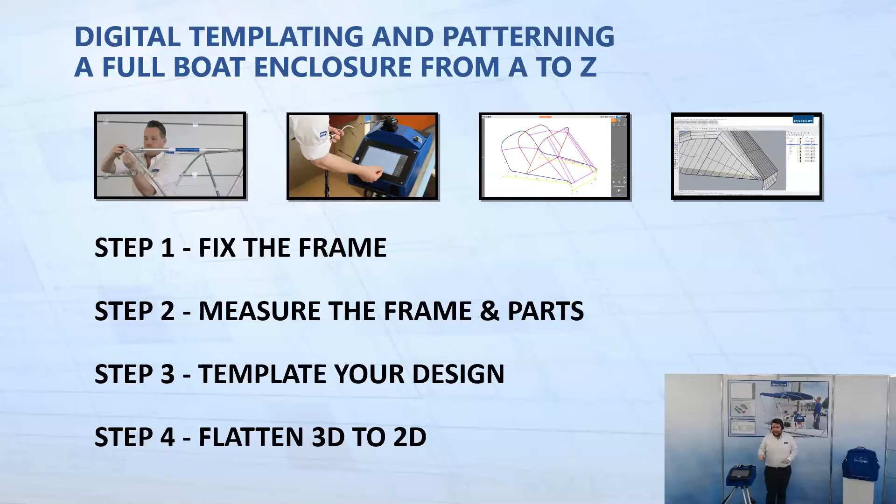We don't want you to change the method you work. We want you to change just the tools that you are using. We want you to skip the nylon and go digital with the Proliner Canvas Package. So let's see how this can be done.

Step 1, fix the frame. Determine the correct height of the frame. We can make sure that the frame stays in position while measuring. To do that, a tensor set is going to be very helpful. Instead of using just duct tape or a simple rope, the tensor will help you, and you can also mark the points that you want to measure, and then indicate where the canvas will overhang and how the whole thing will go. And let's see how this can be done in reality.

So I fix the frame, the Proliner. That's the mini tripod that can come pretty handy for such cases. That's the first part of the tensor that will help us to fix the frame in the position that we really want, and it won't be moving or have any issues afterwards when we want to measure. By clicking and screwing there, you can have it in the exact position, and this is adjustable. We do the same on the other side, of course.

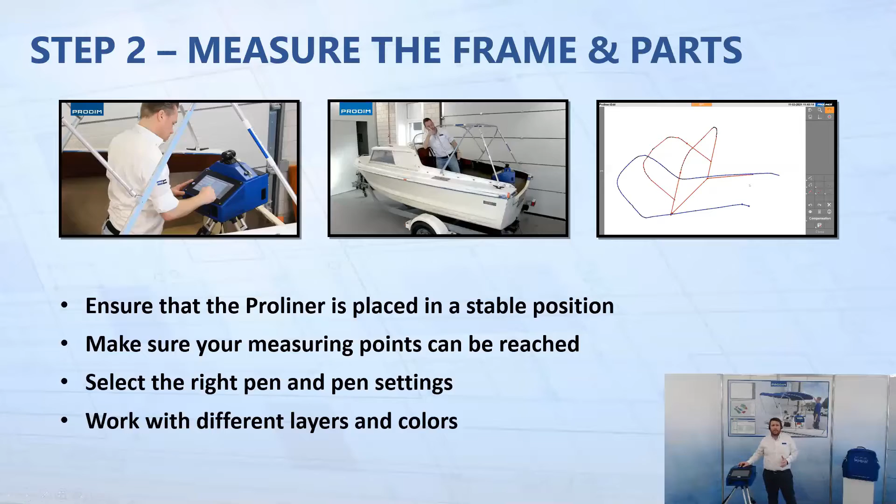Then you can select the right pen, and the pen settings could be the normal pen, could be the hook pen, could be the IPT. And then we can also work with different layers, different colors, because that will make our life also easier in the editing part afterwards. So let's see how this part goes.

Here's where we're going to create the 3D frame, the 3D digital template, sorry. And I start by creating a sketch of how I want my cover to be. This, of course, can be based on your experience and the customer's needs. You already do this even when you measure manually, and it helps you to visualize what you need and which points are going to be pretty useful to have in your drawing. So this is what I'm looking for.

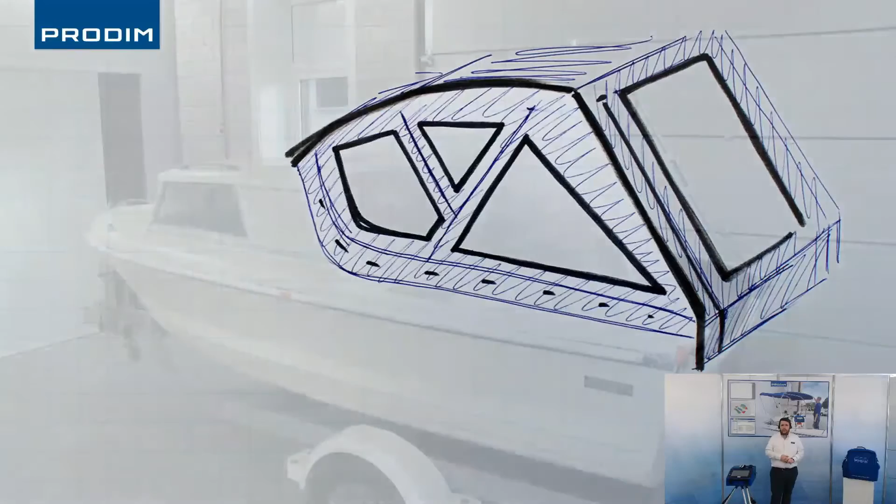I have the Proliner set there. As you know, there is no need for leveling or calibration or anything like that. I can immediately start measuring. I don't care if it's windy, if it's not windy, if it's sunny, if it's not sunny. It doesn't matter, and it won't affect any of my measurements. I put the Proliner in the position where I believe that I can reach all the points that I want to have in my drawing.

I just put the name and the project name and the file name, and I go to my settings. In this case, instead of the normal pointer, the hook pen is gonna come very handy, as it will allow me not only to reach the points that I could get with the normal pointer, but also reach the points that could be behind an obstacle or in the backside of the tube. And that can be very, very useful. And of course, it's part of the Proliner Canvas Package.

We start by getting 3 points, because these 3 points on the bottom of this structure will help us a lot to align our drawing properly in 3D, in the CAD. Already started getting the points that are needed. Of course, for the straight parts, just a couple of points are enough. For the parts where there are radii, the more the better. So going all around, and from the point where my material stops touching the frame, I go directly down to the bottom of this structure.

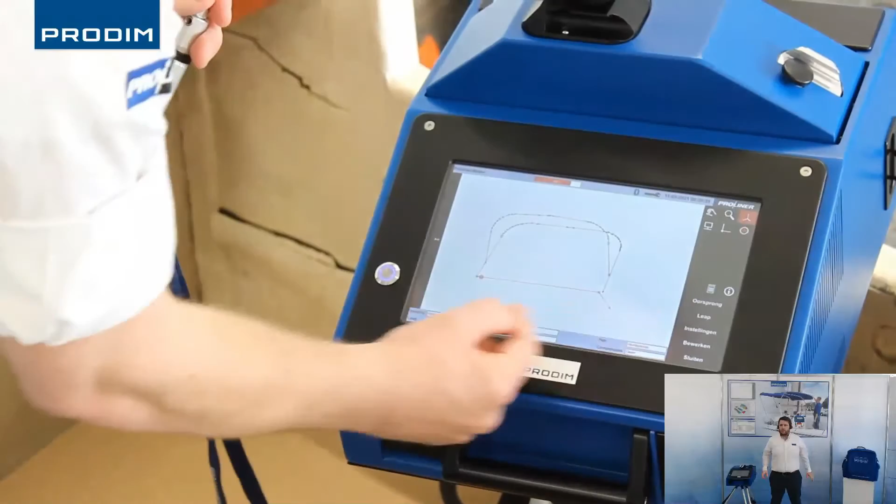And I can already visualize what I have measured. There's no need to export and carry an extra computer or a laptop to visualize, go back and all these things. No, I see on the spot what I have already measured. And this is the very beginning of my drawing.

Now I'm gonna measure the boat itself, so I can have more information, because I will need this line later on for the editing part in order to make sure that this is where the material is going to be touching, or this is where the material is not going to be the canvas anymore, but the transparent part for the windows or something like this might be starting there.

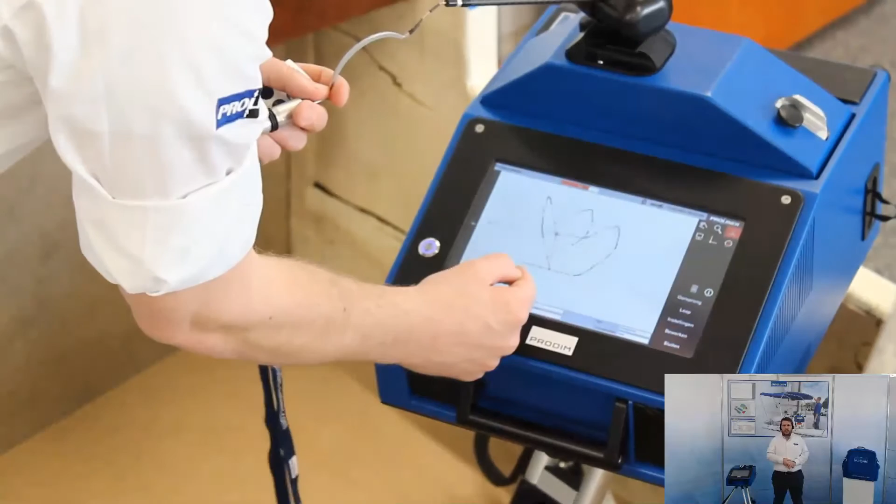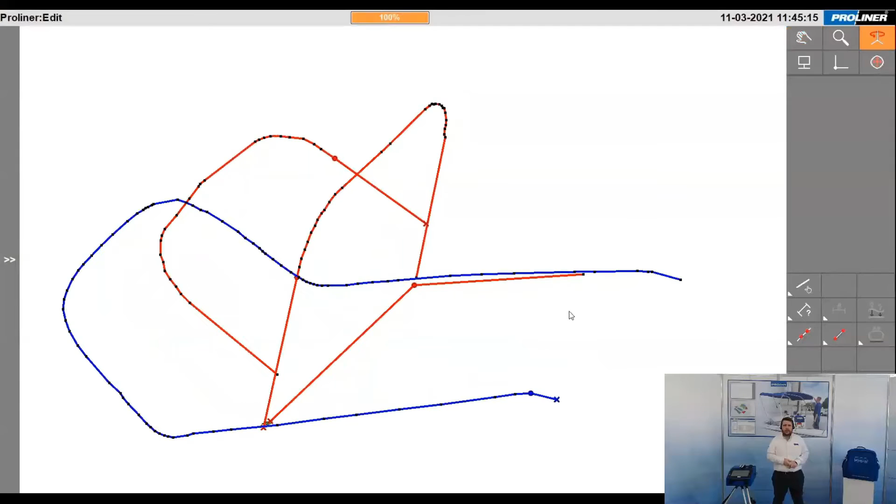So I can visualize here, I can see what I have measured already there. I can move it and rotate it in space in 3D and see how it looks. And this is all I need from that at that point.

The next step is to create your design, to template your design. You start by envisioning your canvas. You have already done a quick sketch. Then you can go more into details. You can decide where to put the windows, where to put the zippers, where to put all the small things. You can determine where you want to have your lines, and you can visualize them by using the blue tape. Especially in the beginning, it's going to be very handy. The more confident you get in 3D CAD, the more you can even skip that part.

You can determine which parts are going to overlap, and of course mark the edges, mark the fasteners, mark the starts for your measurements. And for the points that are not easy to reach with the normal pen, the IPT is where it can come very handy. IPT stands for invisible point technology, so I can measure all the points that I cannot reach with the normal pen. So let's go and see how this can be done.

This is my sketch. This is what I want to achieve at the end of the day. This part, I don't need it anymore. So this is where I can visualize and determine where I want this line, which is going to be, for example, the end of the windows, and I can mark it there so I can see it in reality, and then I can transfer this information to my drawing and eventually to the CAD part. This is for the backside, the side panel, the backside of the side panel.

And that actually looks good. Of course, we do the same at the other side. Here's where the windows will go. So this is what we need, and this is for the side panel of the back side of the back panel.

Mark it, get the extra blue tape. This for the back side, and of course this for the other side of my cover. Marking the points can also come very handy because you know exactly where you want your meeting points of the lines to be. That is there in the back side where you actually have 3 different lines meeting there.

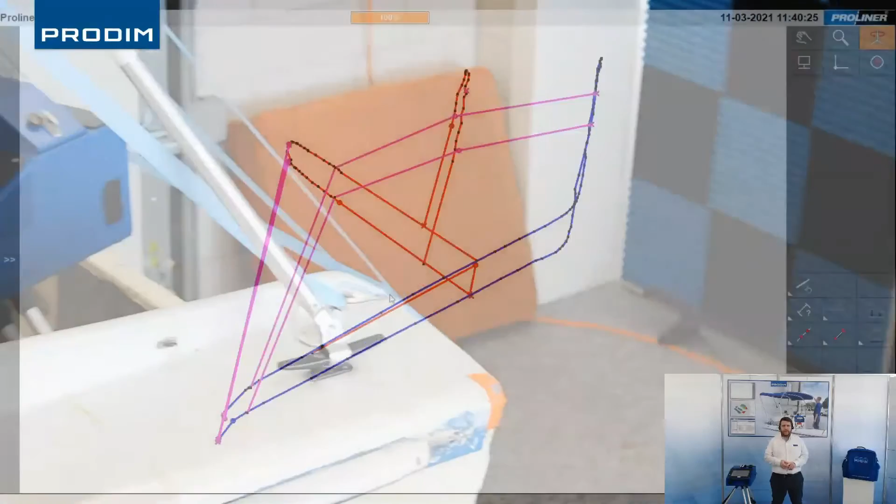Measure the one side, going to measure the same structure for the side panel on the other side. Slowly it has started getting closer and closer to the final shape. This is how it looks like now. So I've got most of the basic information that I need. By using the layers, I can visualize immediately what has been measured now, and I can separate them even easier.

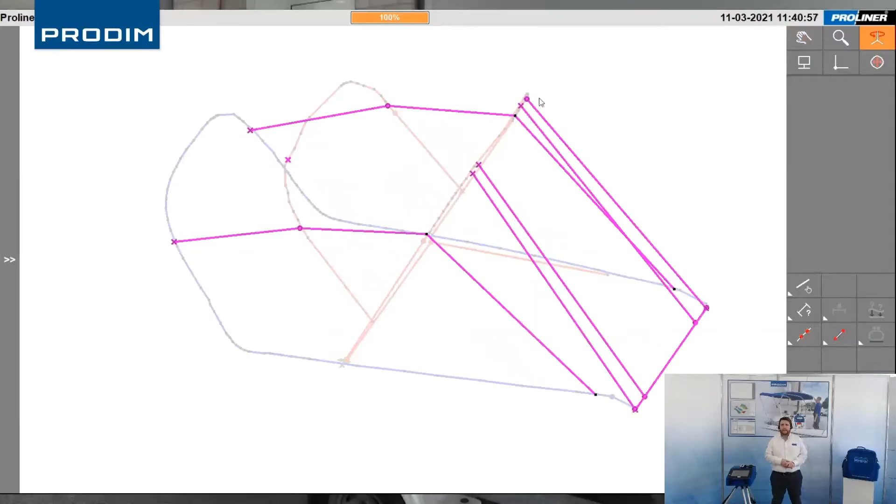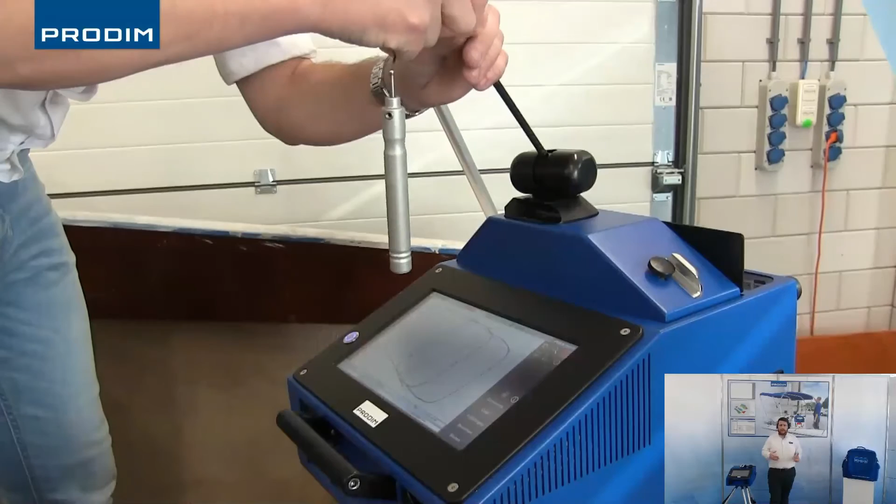And now I don't need the lines. I can actually disassemble the tensor set, as I do not need anymore my frame to be there. This is where I want to reach the points on the external part, on the outside of the boat, and this is where the IPT comes very handy. The IPT goes from 200 milli up to 800 milli, so whatever the case, I can reach the points.

It comes with 3 different tips: the sharp one, the one that looks like a ball, and this one that looks like there is a curve inside. So where I already have a point, I can just go, and it gives me extra stability when I'm getting the points. By measuring multiple points, the Proliner gets enough data to do the calculations on which is exactly the point that I'm really measuring. You see this movement like a cross gets enough points for the Proliner to do the math needed.

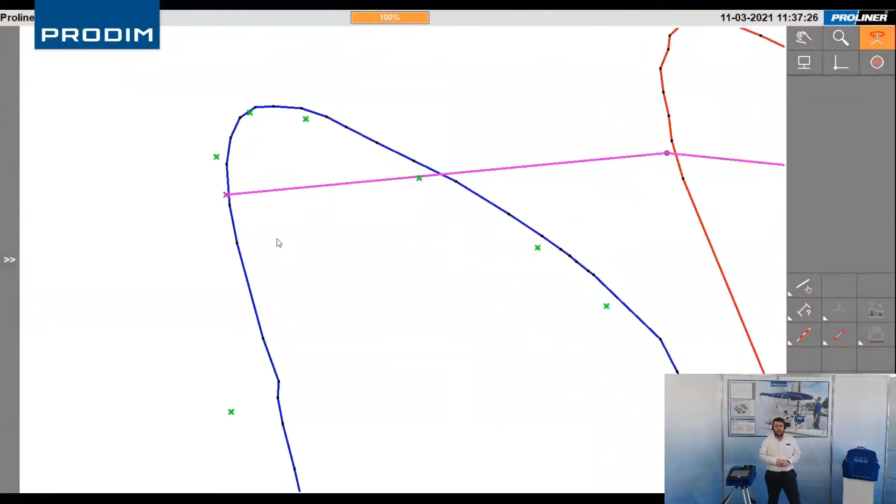I get all the points that I need, starting from one side, going to the other side of the boat, because these are going to be very useful for the buttons or whatever else I want to have there. The same thing, of course, goes for the top side, front side of the boat, of the structure there, and you can see already here the points that are measured with the IPT with the green color, different layers, as it will be handy in the editing part afterwards.

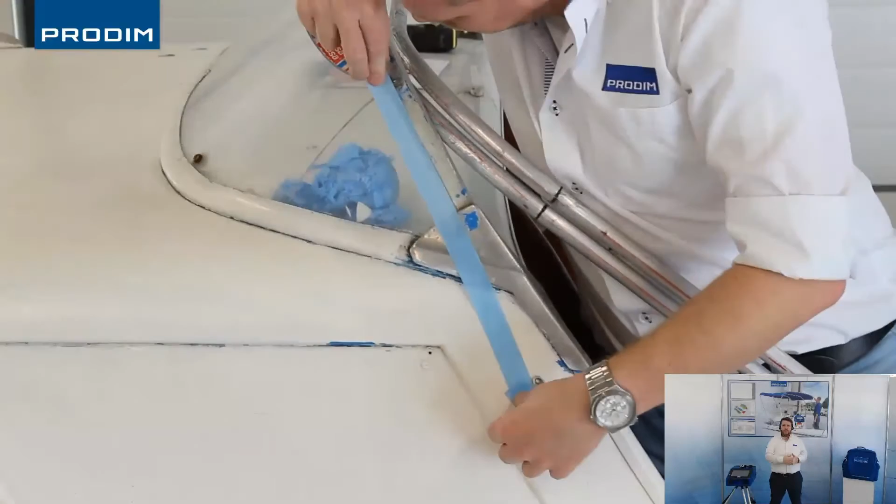And here the blue tape actually helps me even more to visualize where I want to have the end of my panel and how it will follow on that side up to the front side of my structure. It will go from the deck level going up.

Again, the IPT will help me to reach all the points without even needing to reposition the Proliner and use the leapfrog function. Of course, if needed, I can also use that part, but in that case the IPT is way handier.

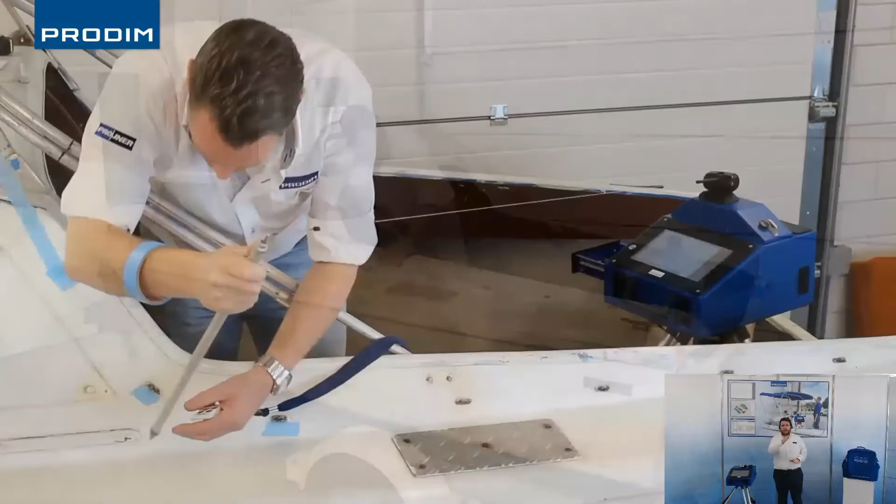So this line actually will help me to see where's the deck level and how far I can go on that part. Here's going to be the end of my side panel, and I create slowly this curve there.

More and more points with the IPT. The same here on the top of the boat, and of course the same is going to be on the other side.

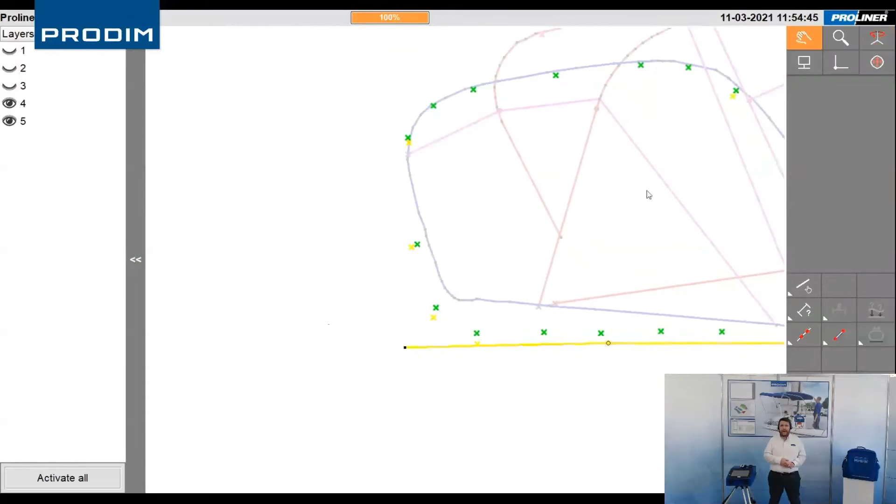And I have got almost all the points that I want. I can see the back of the boat, I can see the decking level, I can see the points that are going to be useful to mark the buttons. I can see where I want to have the end of my panel, and these are all the information that I actually need.

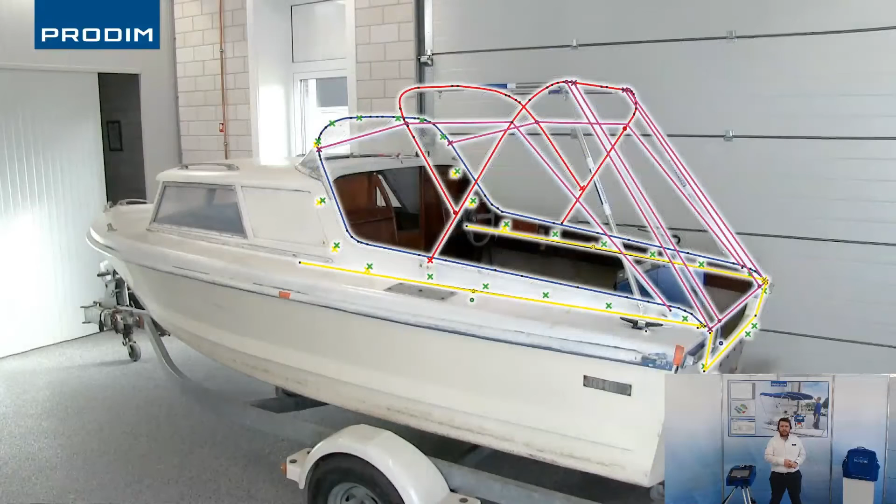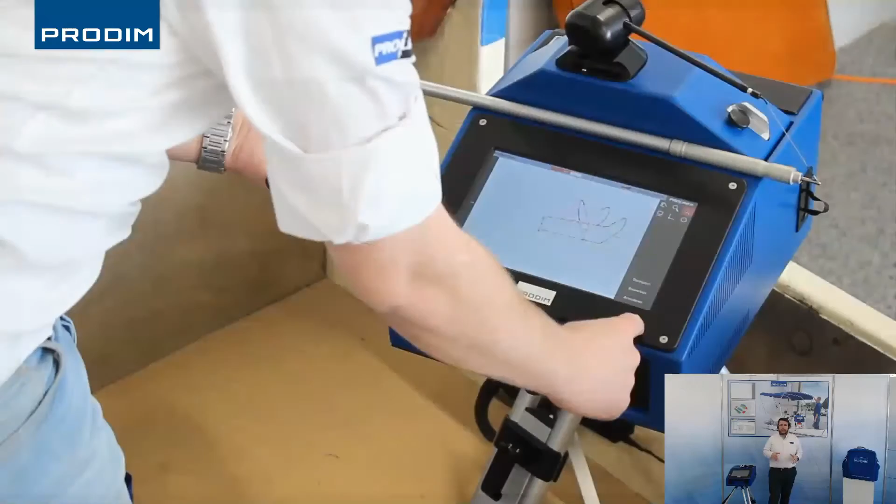So from my sketch to the Proliner 3D measurement, I can already see it on the Proliner, as we discussed before. I'm measuring in a marina in the middle of nowhere, and I can just use my smartphone to send the files from the Proliner, while I'm still on the boat, back to the office for processing, and then go to the next boat and keep measuring.

So once I'm back in the office, there is a process that has to be followed to go from the 3D Proliner measurement to the 2D production-ready files. We start by aligning the measurement, then intersect and connect the lines, loft to generate the 3D surfaces, and then project the markers and all the lines onto these surfaces.

Then from 3D, I unroll everything and go to 2D, where I will need the silhouette. I don't need the surfaces anymore, just the external contours.

Once that's done, I can also do the tension - there's a trick on how you can have everything super tight without extra material. You can add reinforcements, zippers and windows as the customer asks or as you want them to be. You can also add seams and markers to help create the files ready for production.

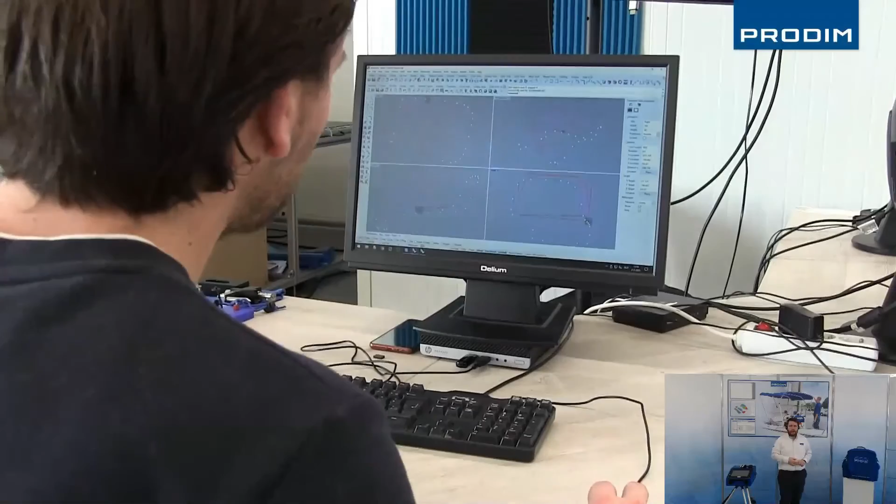So how can this be done? I'm still on the boat - I can send the files back to the office, or just open my laptop there and start working.

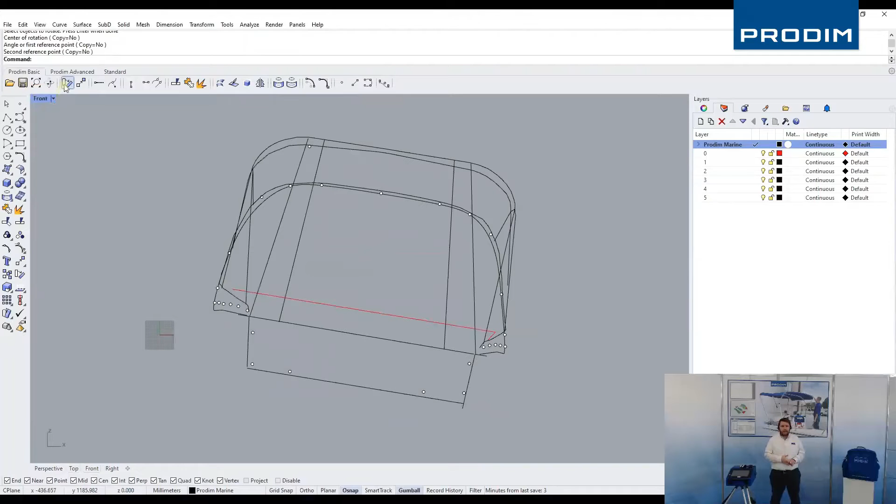Step number 1 is to align the measurement. This is where the 3 points we got in the beginning come very handy. I can use them to align the whole measurement. Here is that line, and I bring it onto a horizontal plane, so I have different perspectives. Here I'm using the front view, as it will be even easier for me when I need to use the different perspectives.

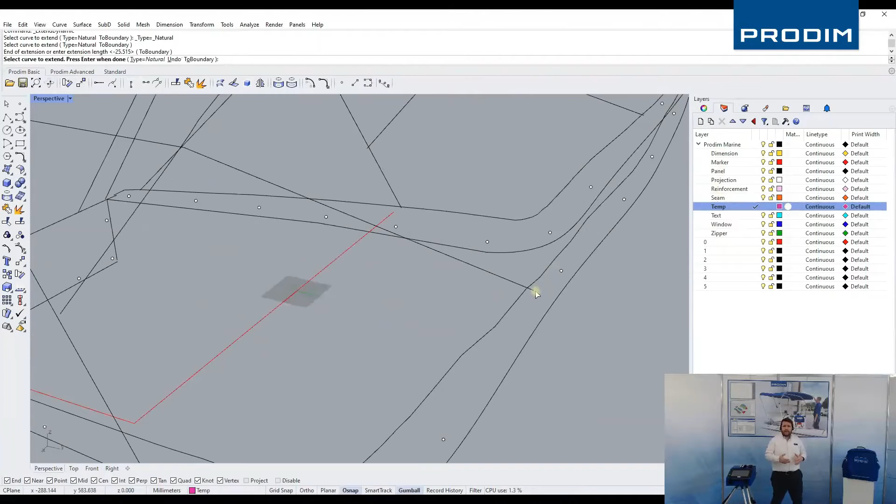Step number 2 is to intersect and connect the lines, because we've measured the lines in 3D - they're in space, so they're not connected, not like simple 2D drawings. You can extend the lines and see exactly where they meet with each other, which is very important when creating the actual surfaces. So I extend the lines where I want them to go all around my drawing, then use the command called closest point, which shows the closest point between the lines.

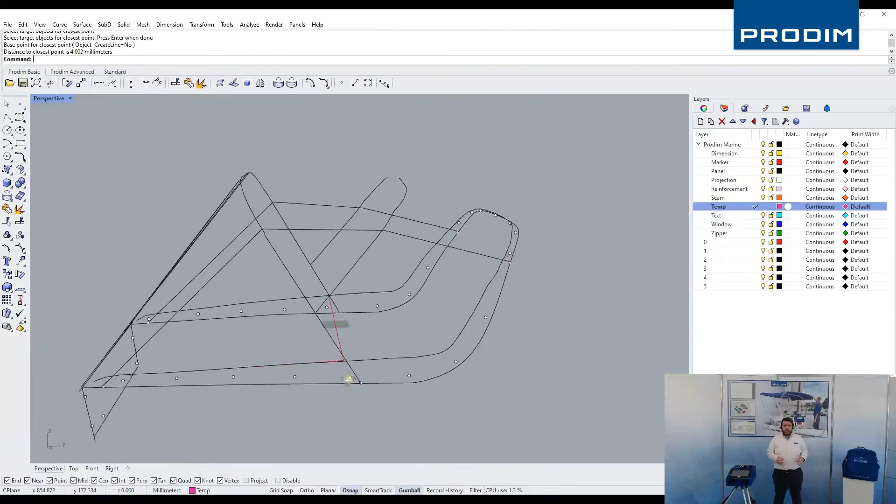You can see at the top there is the Rhino Prodim toolbar, which comes as part of the package. There are about 15-20 commands that you're going to be using on a daily basis - those commands are enough to create and finalize your drawing. There's no need to go around looking for them; we already have them ready for you.

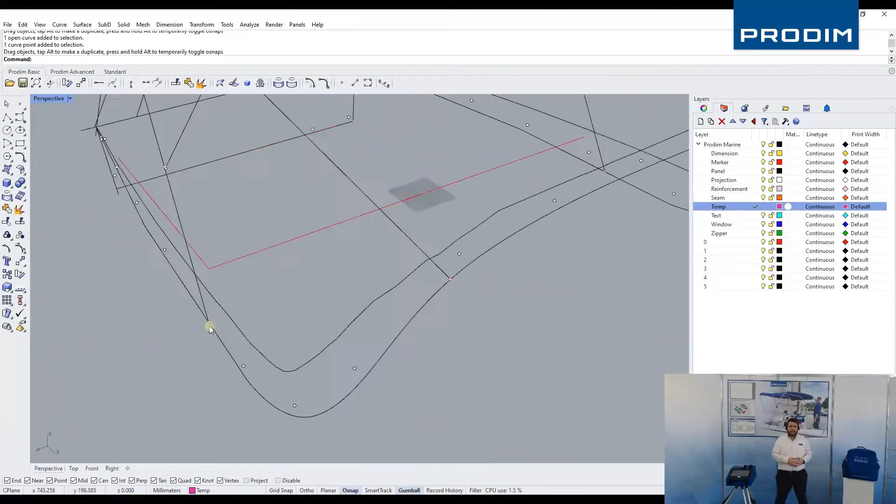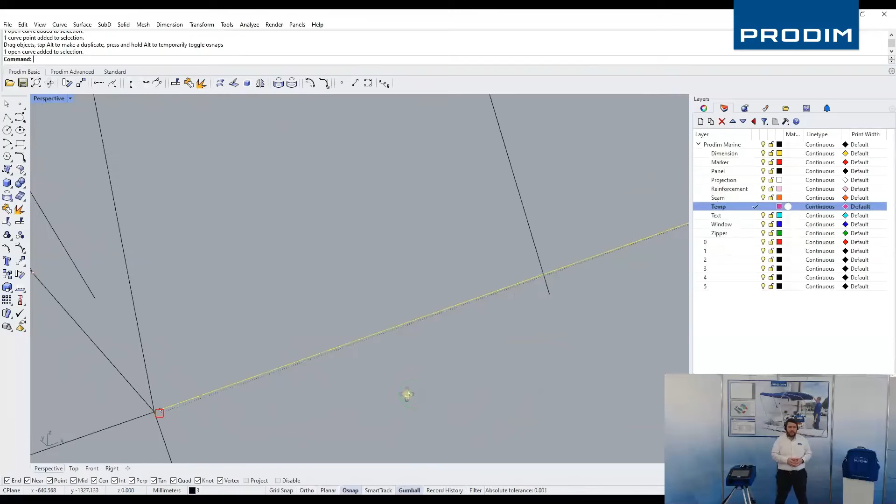Connecting everything so that we have the correct lines where they want to be, repositioning to make sure everything is on the spot. Here is also where the 3 points meet, and the same happens on the other side, connecting all the points there.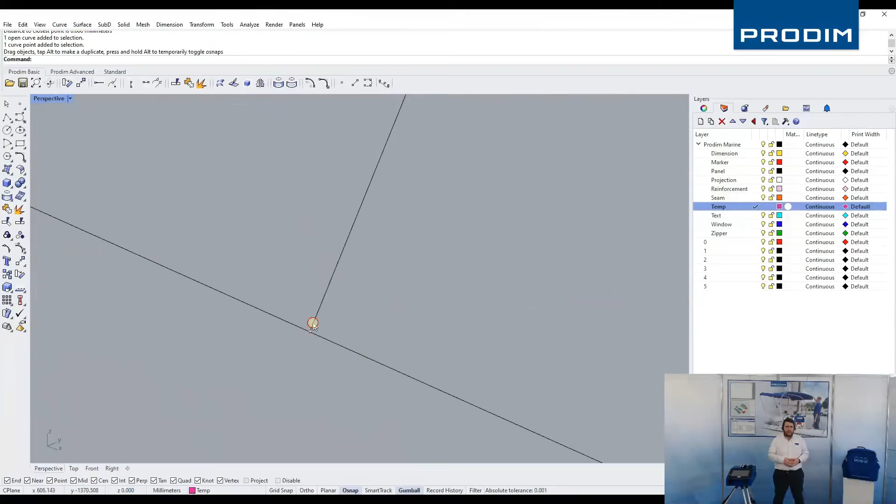Rotating my drawing is very important and useful because it makes everything so much easier to see from the correct perspective. Again, the closest point command comes in handy, as I can move the line exactly to the point where they would be meeting, with the minimum deviation.

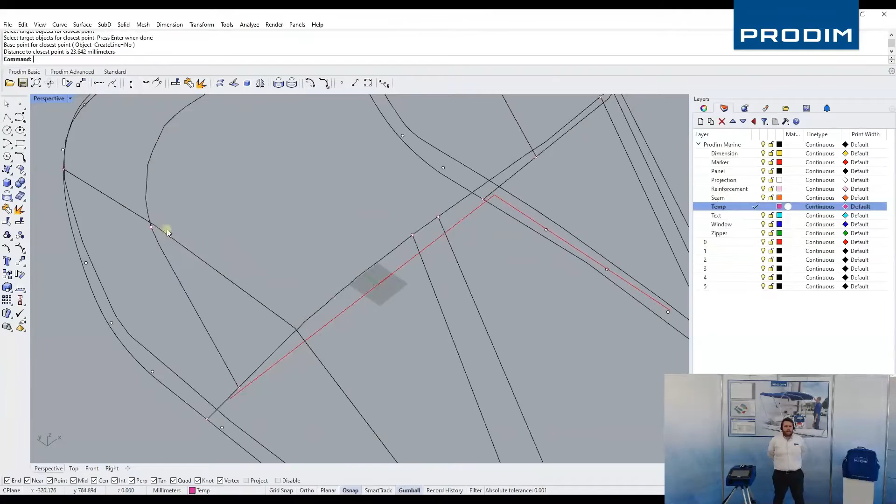The same happens here for the point, for the side panel - this is where they will meet. Also, on the other side panel, the same has to be done.

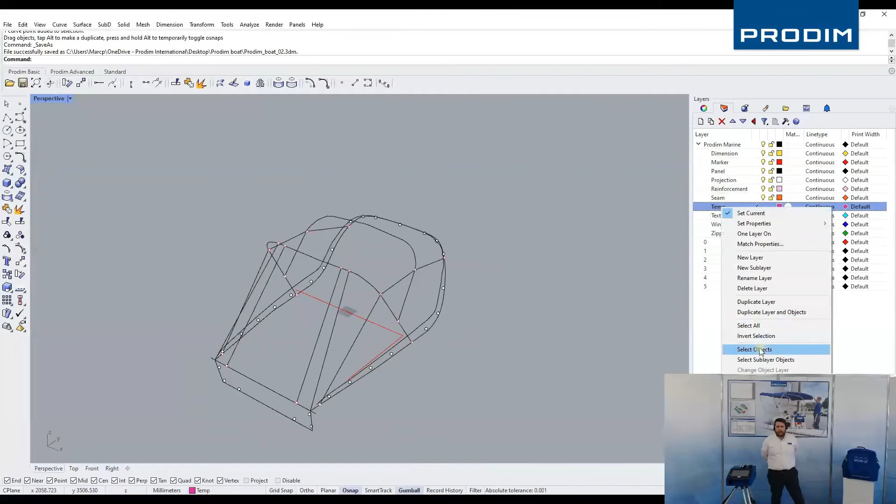Again, using the targets and different layers can come very handy, for what you want to see and what you want to activate. And this is the part where we're going to create our surfaces.

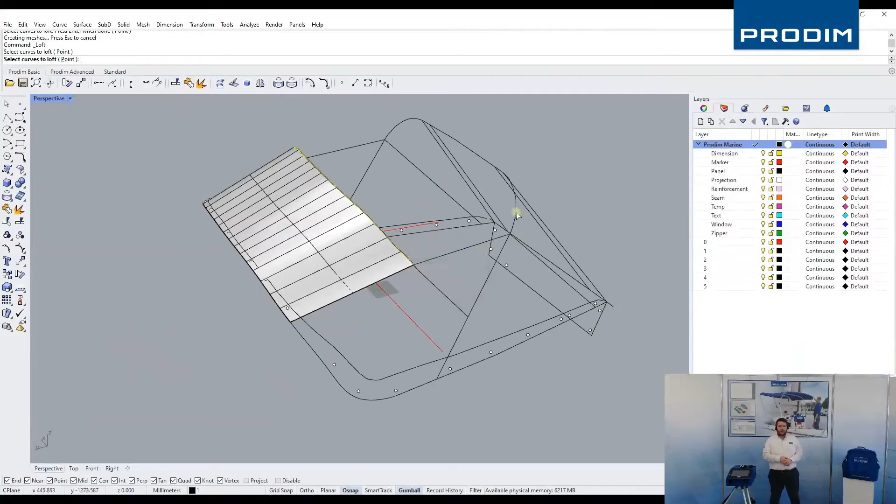Loft is the command used here - this one without simplifying, and this one with rebuilding. You can play with the control points you want to measure, depending on the size of the panel, and choose the correct number of control points. For example, here 20 control points is a good number so you can take everything into consideration.

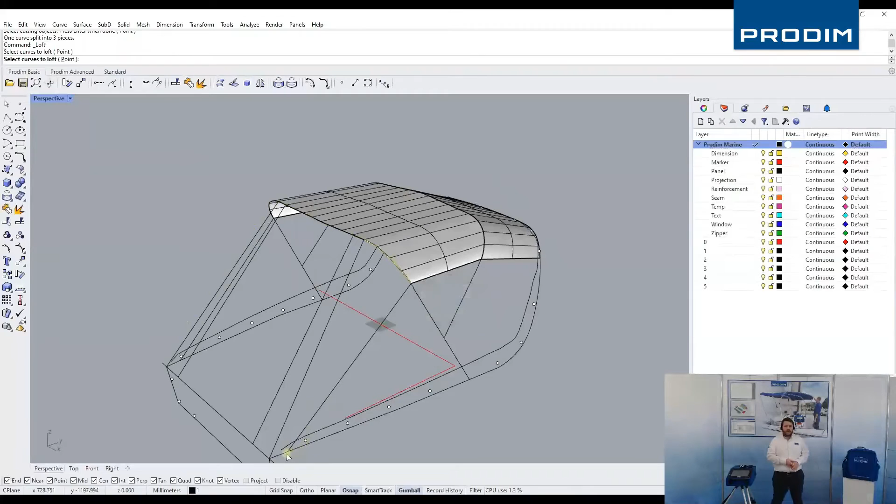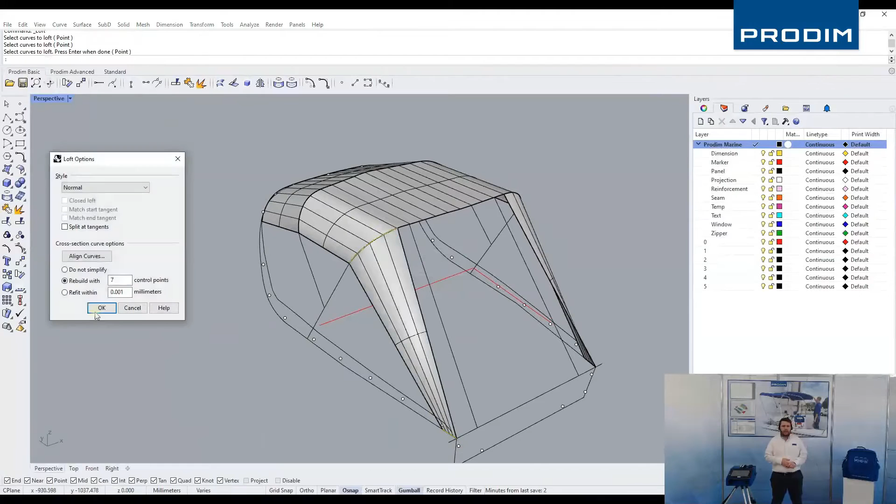This is an even simpler one - splitting the lines and joining where you want. Here we can play around again with the control points, 4, 5, 6, 7, depending on the surface we want to make, and it's already starting to get the shape that we want.

So I wanted to do everything, I wanted to do the same process for all the panels. This is the final result in terms of surfaces.

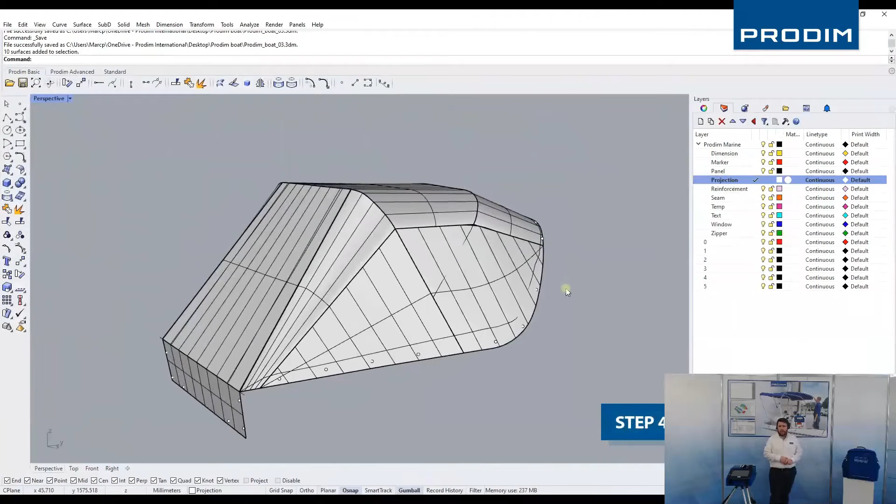Now is where we want to use the lines that we got for the windows or for the markers. These are still 3D lines, but I want to project and pull these lines onto my surfaces, because this is going to be used afterwards in the unrolling part.

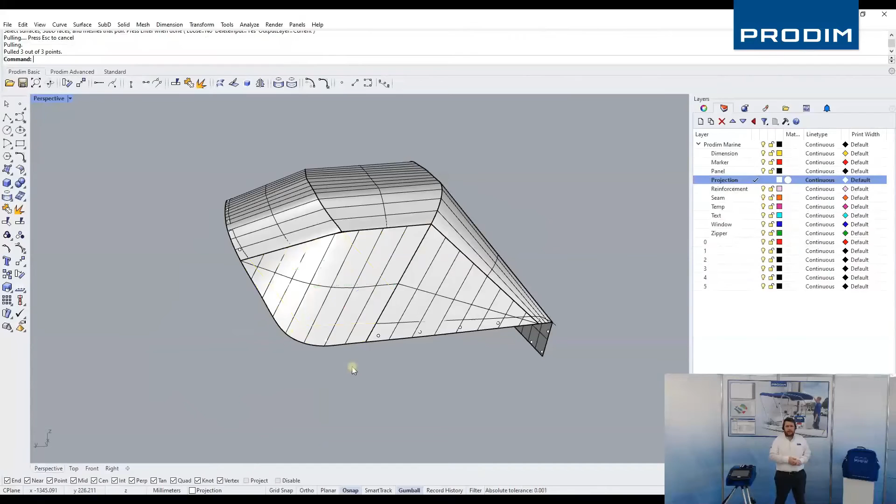So now the lines and the points that I used to have, as they could be the fixtures or trims or whatever could be the case. Again, pulling everything to the surfaces, doing the same here, and then pull it to the surface.

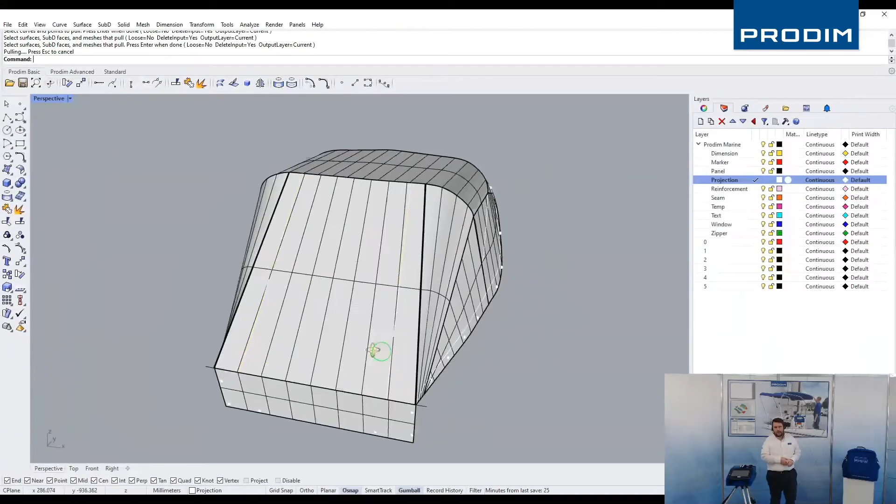The same goes for the back side, because this is where it's going to show where I have the material and where I'm going to have a transparent part for a window or whatever I want to have there, a door or whatever could be the case.

Selecting the surface and move them out of the lines. Again, using different layers, of course, is very handy.

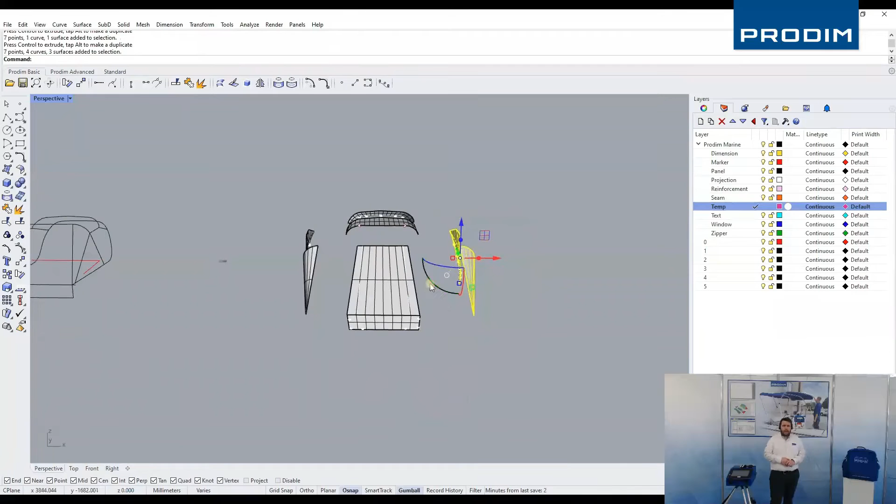So now getting apart the structure that we have created, because this is going to be easier to visualize everything. And this is where also the gumball, having activated the gumball, comes pretty handy in terms of moving everything or rotating everything into space, yeah, like now.

And I have got the 3 parts that I want, all the parts that I want actually apart.

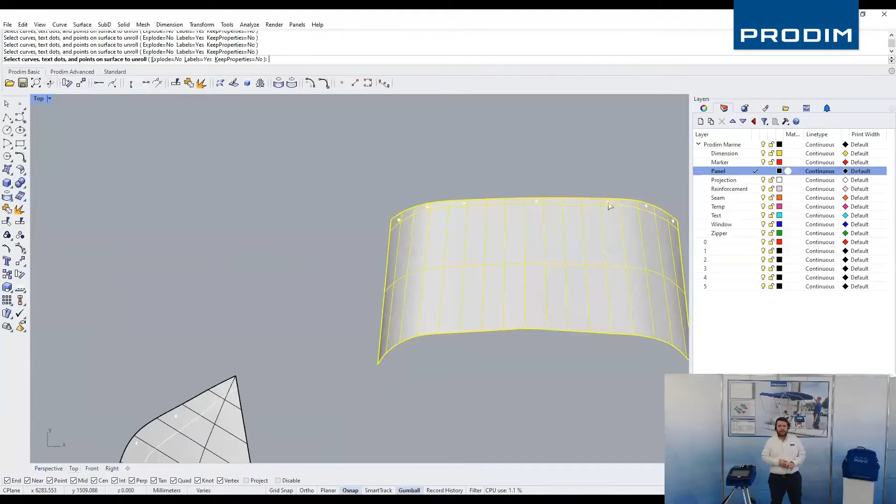So unrolling, selecting the surface, also selecting the extra points and lines that I want to be in the unroll part, and I see here that everything from 3D got into the 2D panel.

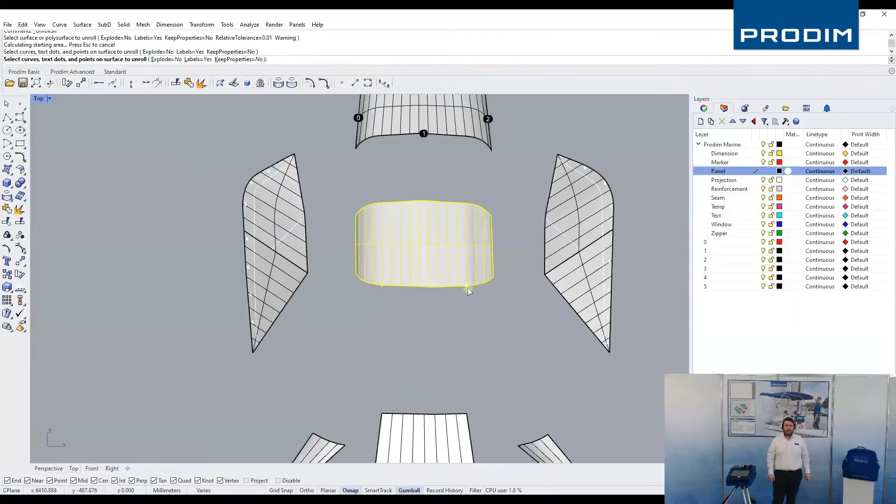The same process applies for all the panels. Select the panel, select the points. By using the labels, it helps me identify which line has to match with what. So the numbers 0, 1 to 3 should all be matching, one with the other.

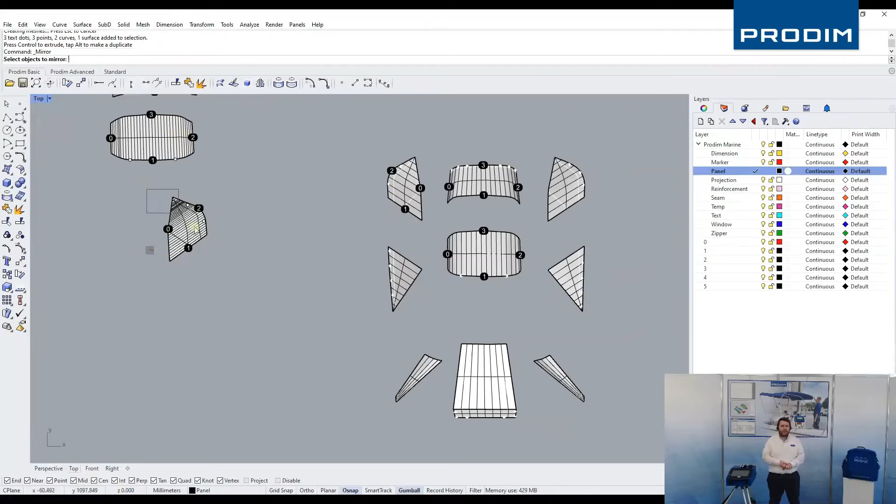Here again, unrolling this surface, selecting the points. Sometimes my drawing might be mirrored, so I can use the mirror function that's already in the toolbar to mirror it and put it back in the position that I want.

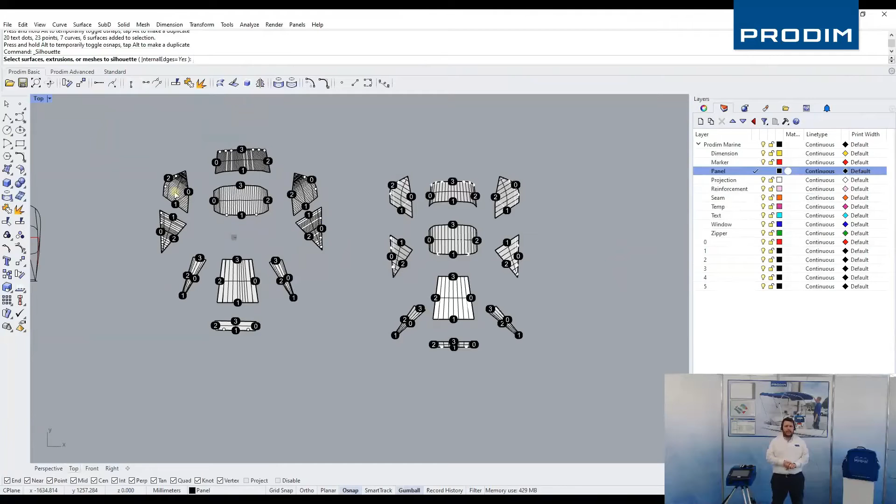Once I have done all the unrolling parts, I can just go and get the silhouette. So I create the surfaces, I select the surfaces, and I get the external contours with the silhouette of those surfaces, which from that point and further I don't need anymore, so I can just delete them.

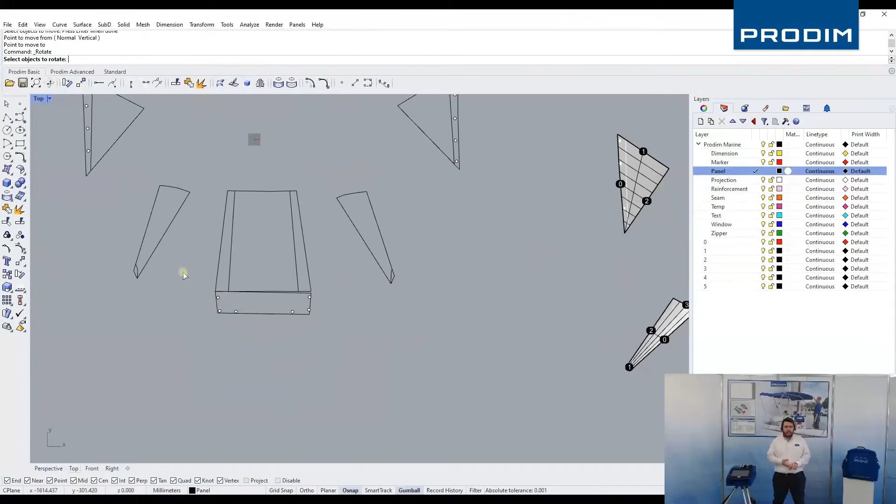And I see that I have the 2D panel and the lines that I have, including all the markers and all the lines that I have for the windows or everything.

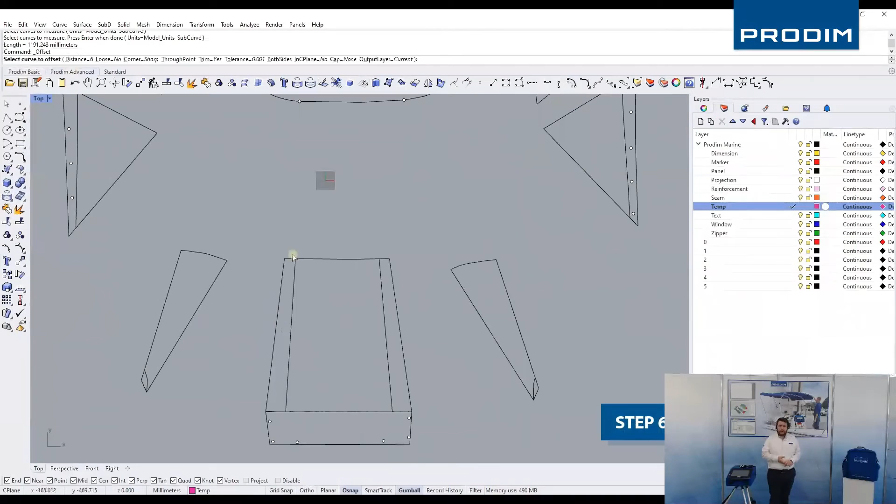Here's where you can make the correct tension, so you're sure that you don't have any additional material and everything looks fine, by doing an offset of a few millimeters, depending also on the length of the line. The two ends remain the same, while the center will be from the line that has been offsetted in the middle.

So I create a line that has a curve actually, leaving the two edges the same, while having the middle going a bit further inside, doing the same on the other side.

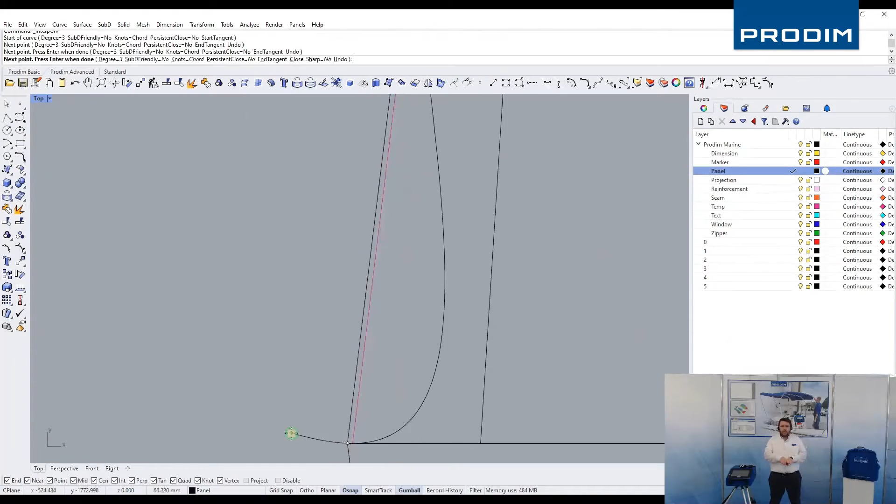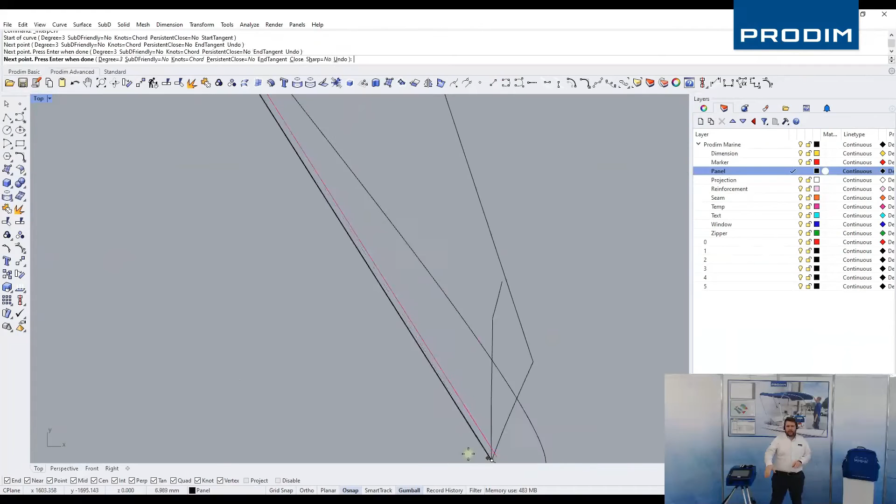So when I join those panels in production, they will be as I want them, and the material will be without any excessive material that I shouldn't have there, and it will make my work look nice and sharp without having excessive material that's not needed there.

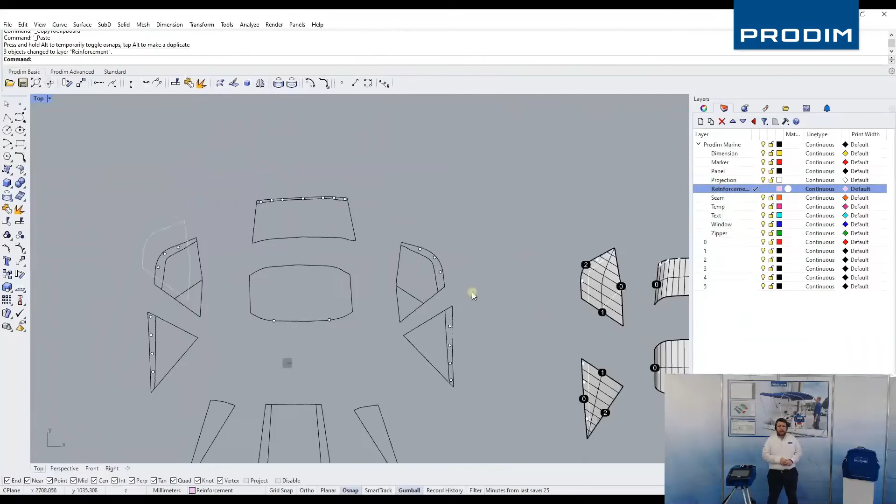Next step is about the reinforcement. Some places, in some panels, you have to have some extra material that you can use there. Of course, as we discussed earlier, using the different layers can come very, very handy.

So I get the external contour of those panels, and by having those you can then create the extra reinforcement that you want there. But just by using the offset command, you can create the pieces that you really need to have.

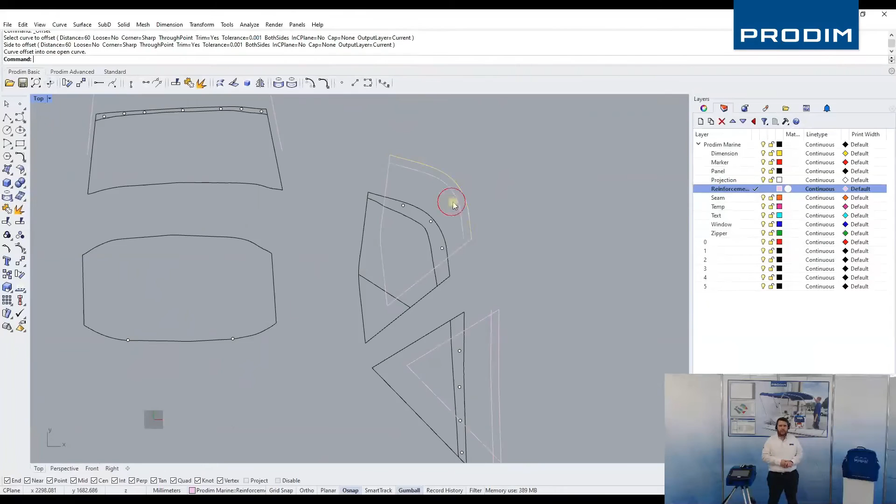It's the same process for all the panels all around, of course. Here, going inside.

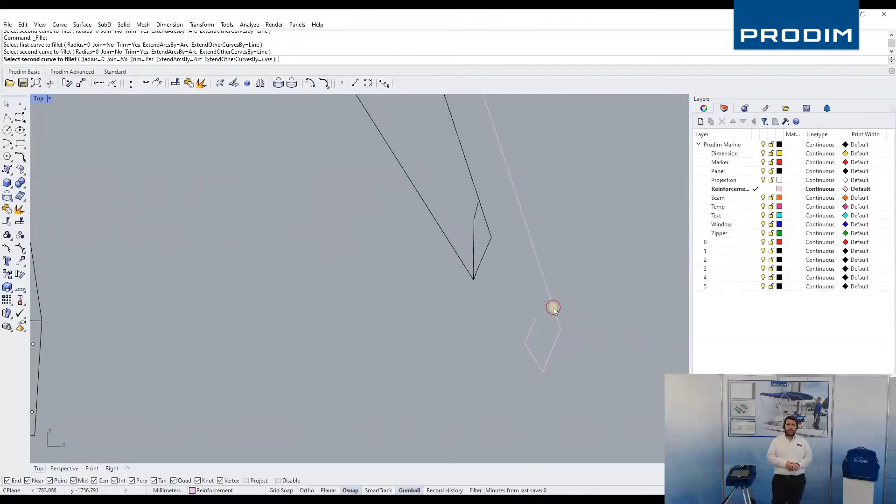In some parts I go here and I can create and connect the lines, because I only want a small part there. So just by using the fillet command with 0 radius, it's super easy to do it, because now we're not anymore in the 3D editing. The 2D is even easier.

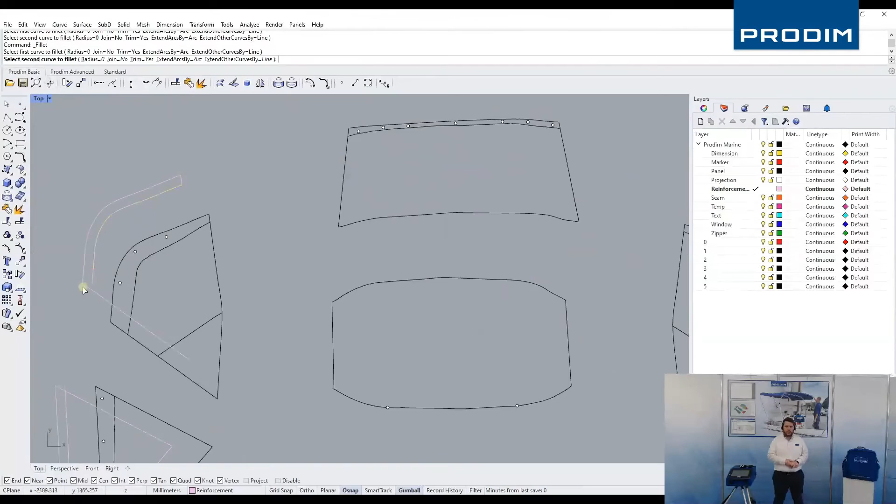Connecting the lines all around. And that small panel as well, and the back side, of course. Deleting what is not needed anymore. Connecting the small corners there.

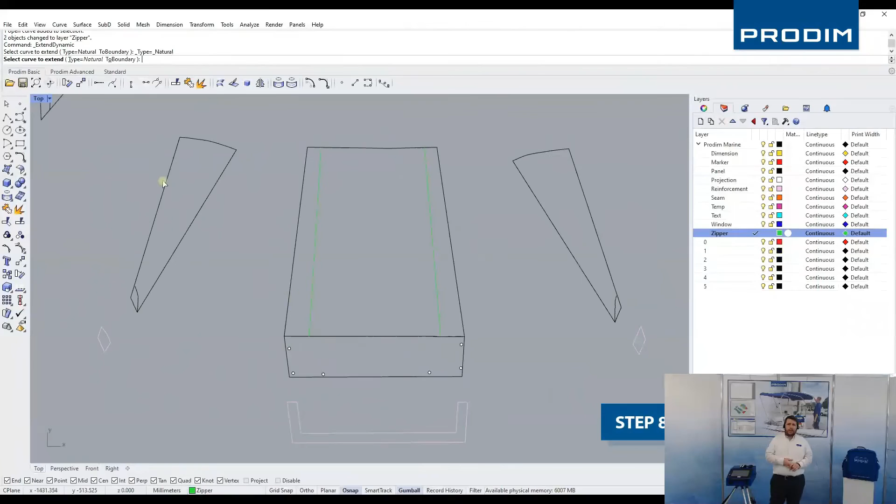Next step, the zippers and the windows: the line that we got by measuring the blue tape, and this was transferred throughout the process till that step, because this is where we want to create the extra zippers or the openings for the windows. Here we have marked already in advance where we want them to be, and by doing a couple of lines and offset, at some point we might have also to mirror in order to have the correct direction of the panel.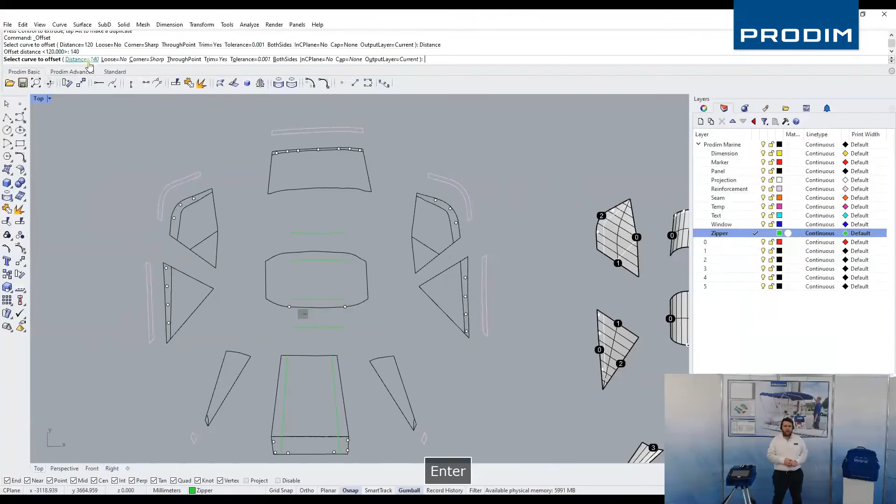And this is also here for the back side. This is the one where the top panel meets the back side of the panel. This is where we mirror in order to get the correct direction that we need. Adding the extra offset that we need for this part. Doing the same here. This is the one that will go most probably underneath.

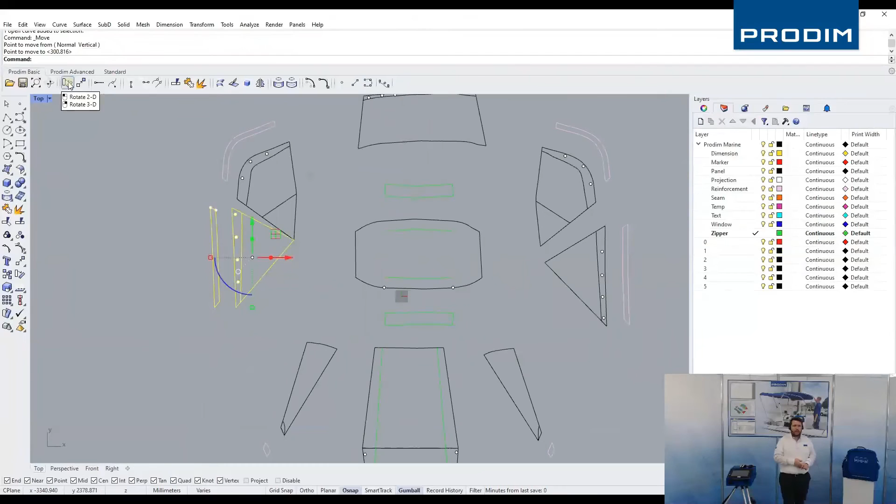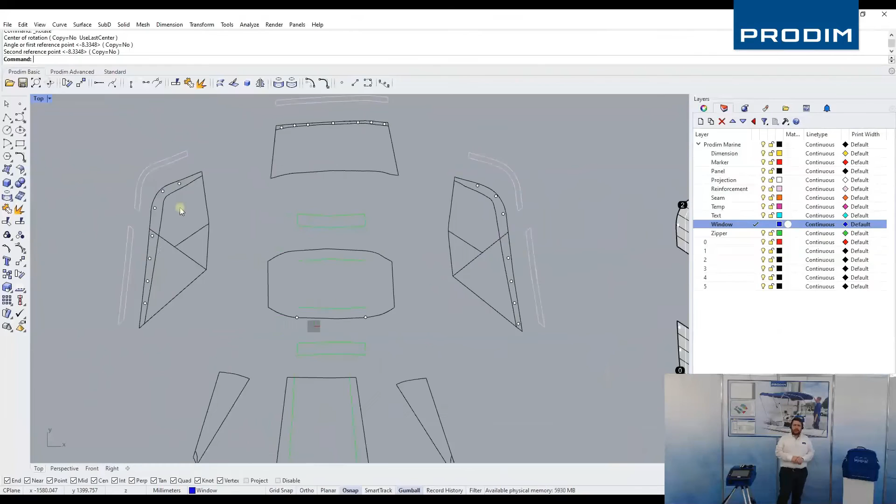And here is where we actually join back the two side panels in one, because this is going to be helpful when we want to create the windows, as we had envisioned them already in the very beginning when we created the sketch, the design that we want to have. We have the lines of the tubes, so we can offset these lines both sides in order to create either both sides or the one side.

Here is just the bottom side, here's the top side, here's the one in the center of this frame, and the same here for the back window. And slowly it has started getting the shape that we really want. Now it's just to connect everything by using the radius that you want or the customer wants to have. Connecting the lines, deleting and splitting what is not needed, and connecting everything there.

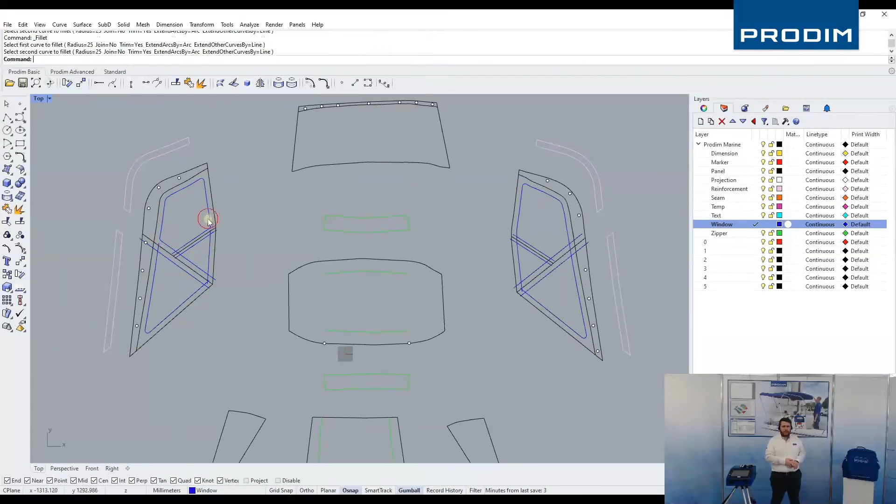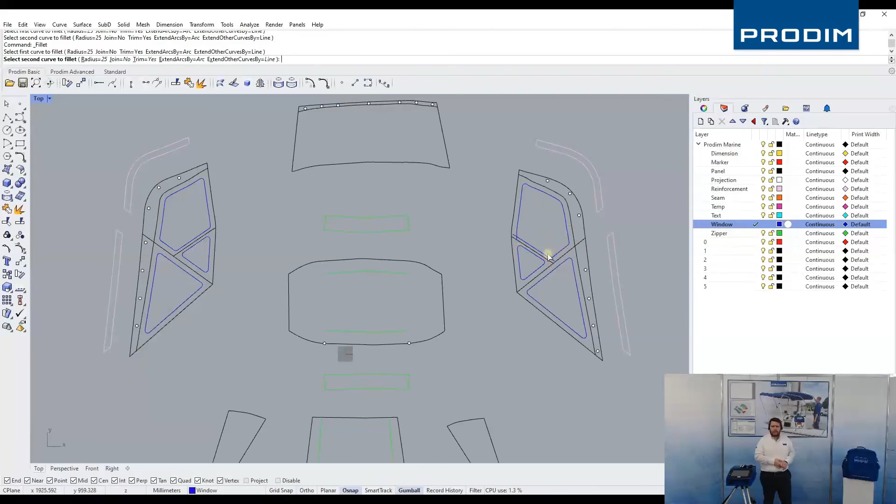And that's my first window, second one, and the one side panel is already done. I'm about now to finish the second one at the other side of the boat. And now it's the back panel. We did the offset, and now just connect the points to connect the lines that we want.

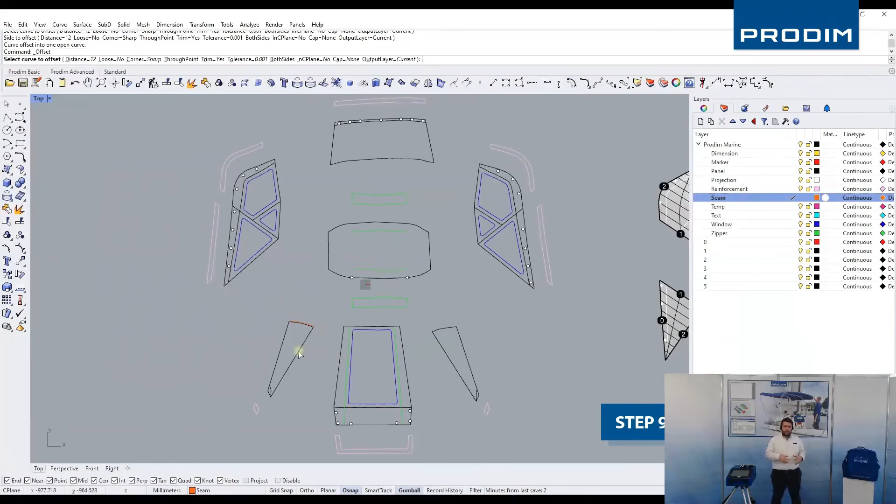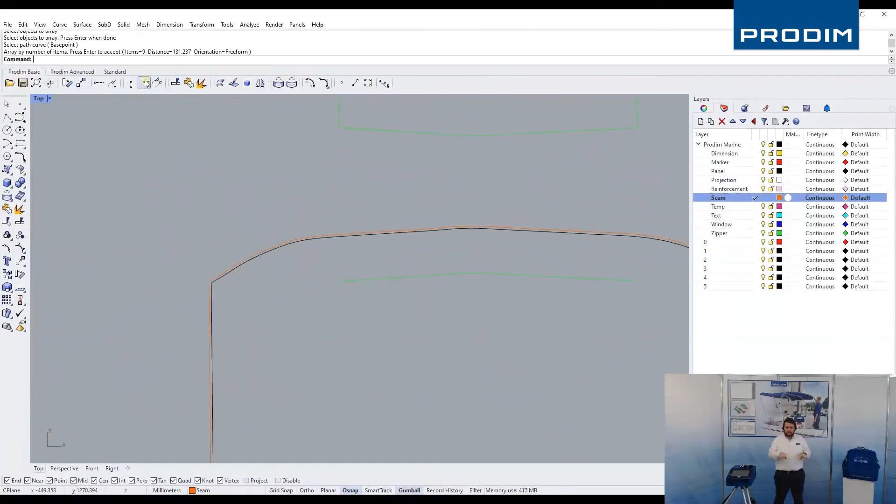This is the part where we can have the seams and the markers, so that we know, when we are in the production phase, how we can match those panels so that we do not sew them where they shouldn't be, but where they have to be. And we do that by making a small offset, and then once we do the small offset that is required there, we're gonna create a small line, which is the one that we're gonna multiply along the curve, and will indicate the points that we want to use as seams, and the points where we want all of the panels to match.

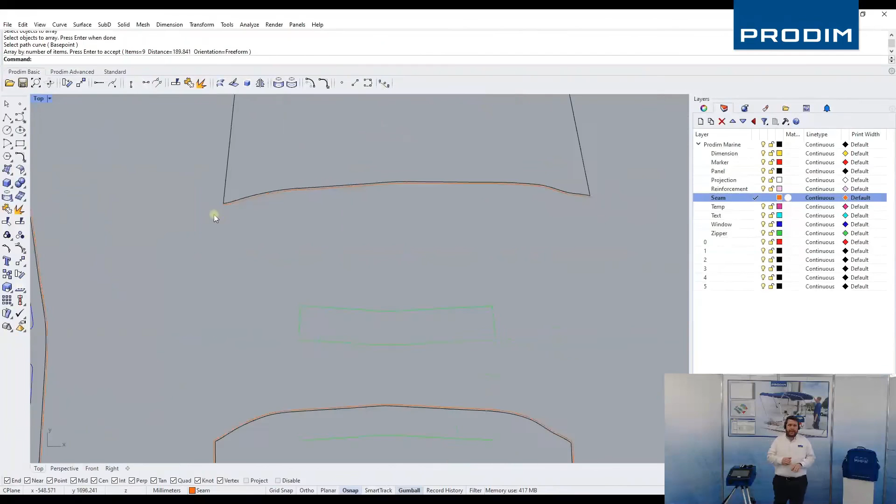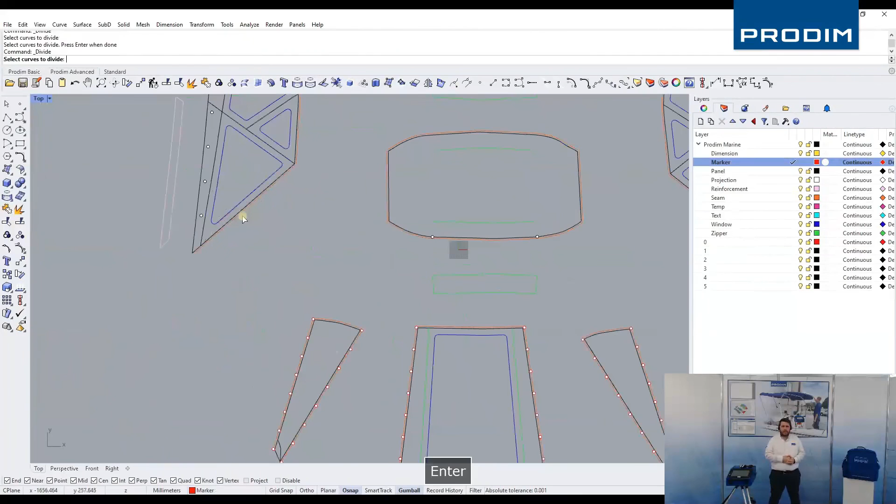So for example, the front side of the top panel will meet with the back side of the front panel, and so on, all the pieces will meet with each other. You can define how many points, how many segments you want to divide your lines. So this one actually meets with this. This one will be meeting with the bottom one. This panel here meets with the back side of the top one. This side is going to be meeting with this side there. That side meets with the side panel of the top panel. The small ones in the back.

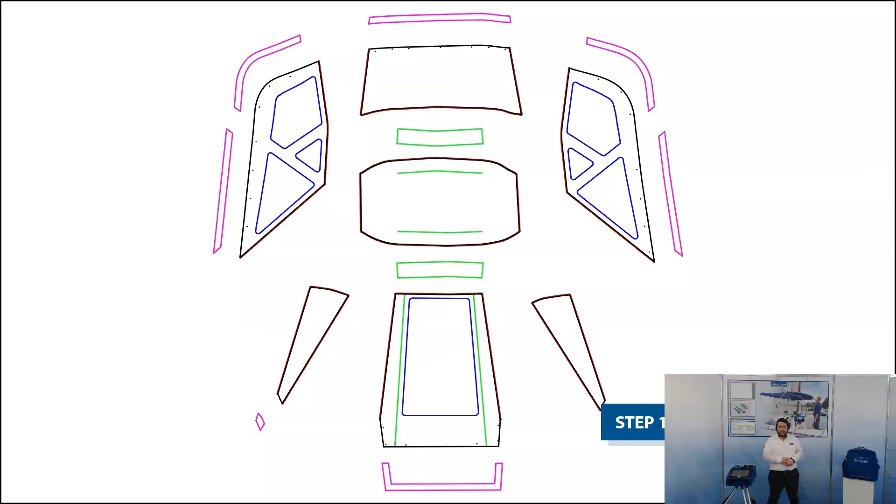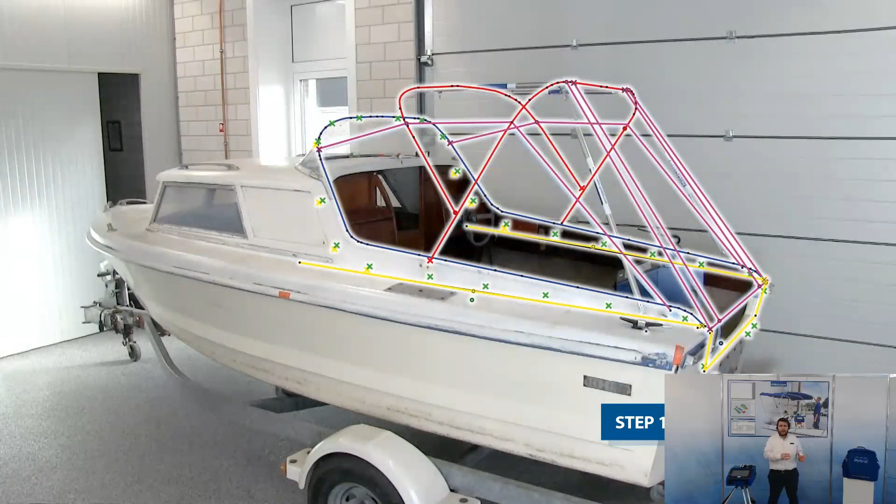And actually, I have done everything. My files are ready for production. It didn't take us hours after hours, and I passed from the envisioning to the measuring part, and now to visualizing in 3D how it looks, and I can give the panels to the Prodim plotter, or to any other plotter, and start marking them, or even start cutting them, while the person who measured could still be on the boat, or measuring the next boat.

So that was about it. That is the whole process of digital templating and patterning a full boat enclosure from A to Z. You saw all the parts, all the steps: fix the frame, measure the frame and the parts, then create the design, and eventually get from 3D to 2D by using the Proliner Canvas Package.